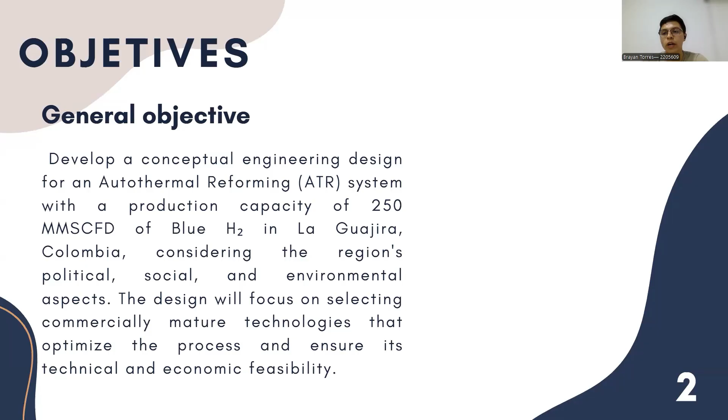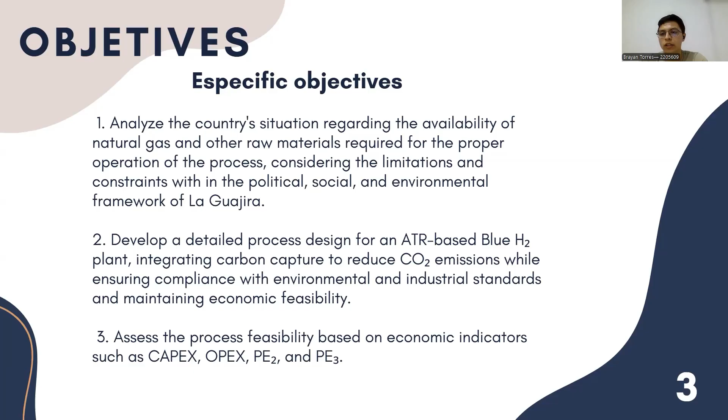Regarding the specific objectives, the first one: analyze the availability of natural gas and the raw materials in La Guajira, considering political, social, and environmental constraints and limitations. The second one: design an ATR-based blue hydrogen plant with carbon capture, ensuring compliance with standards and economic feasibility. And ultimately, evaluate process feasibility using CapEx, OpEx, and the economic potential 2 and economic potential 3.

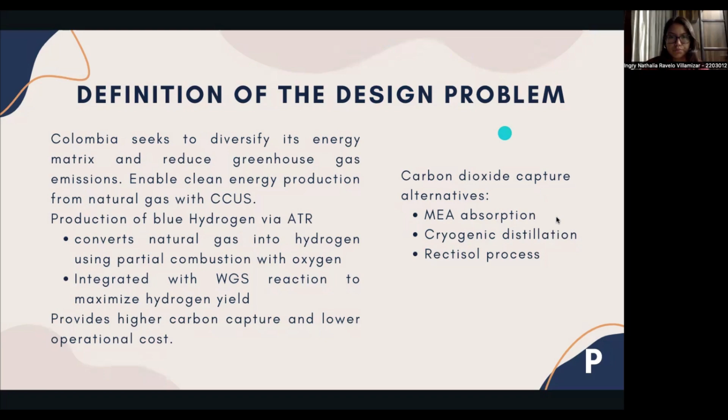Design problem. Colombia faces the challenge of reducing greenhouse gas emissions. In this context, blue hydrogen is a key solution. Process overview. The steam methane reformer is the most used method for hydrogen production. It begins with methane reacting with steam over a catalyst.

This reaction is endothermic. Then it goes to a water gas shift reaction, where CO reacts with steam to produce additional H2 and CO2. This process occurs in two stages: a high temperature reactor and a low temperature reactor. Then hydrogen is purified using pressure swing adsorption, which removes impurities. Meanwhile, the process optimizes energy use by recycling of gases.

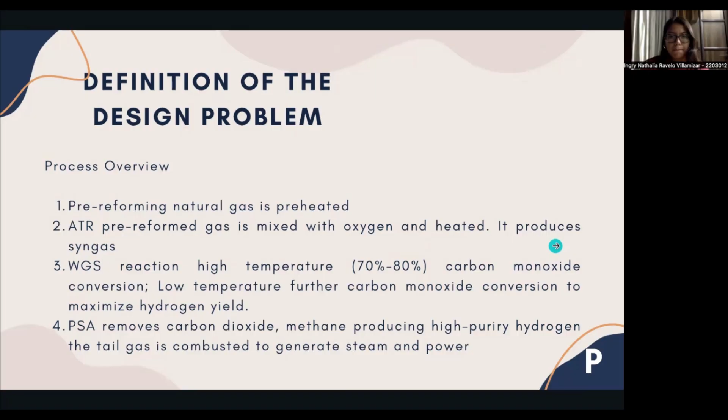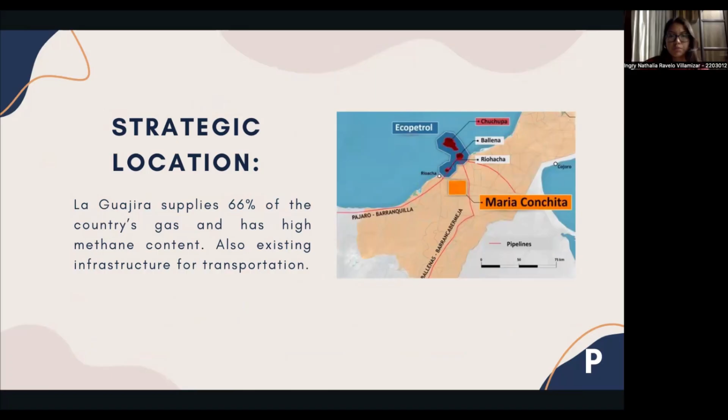We chose La Guajira as a strategic location because it supplies 66% of the country's gas, it has high methane content, and there exists infrastructure for transportation. Some environmental and social limitations are that La Guajira is highly vulnerable to climate phenomena and faces water scarcity. The department's water sources are under special protection. Some constraints are that it requires consultation with indigenous communities, because 73% of Guajira's territory belongs to an indigenous community.

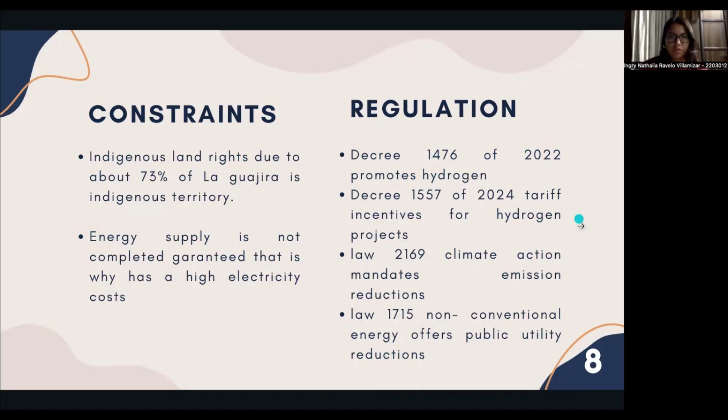Regarding regulation, there currently exist several decrees and laws that promote hydrogen utilization, incentivize hydrogen projects, regulate carbon dioxide emissions, and offer tax reductions. Some technical factors are, for transportation, Promigas ensures a stable supply of natural gas, while Air Liquide provides on-site oxygen, reducing logistic costs, with water from the Ranchería River, ensuring availability. Risks could be water scarcity, oxygen security, and gas supply dependency.

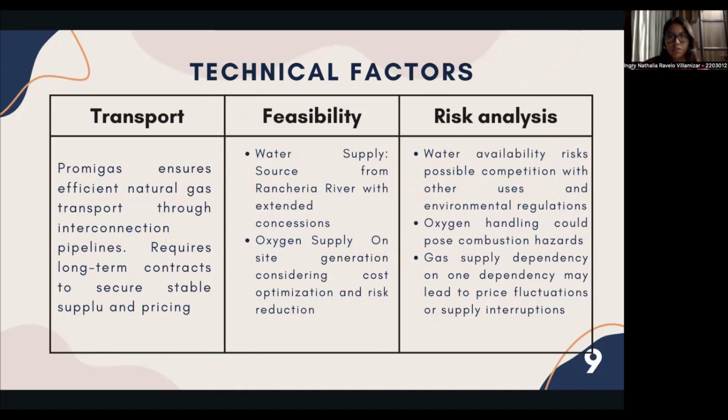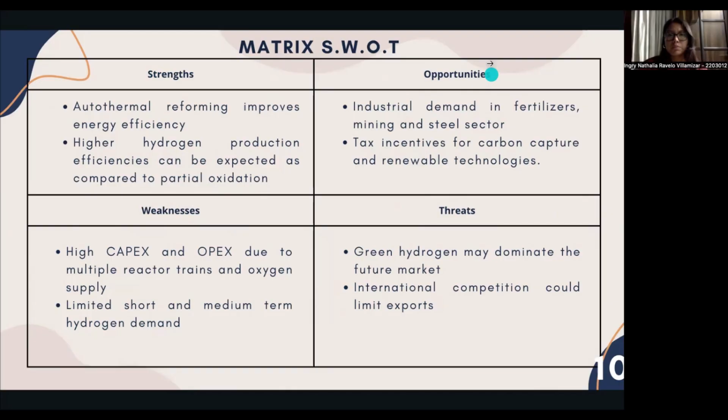All right, I'm Nathaniel. I'm working on solution alternatives. The first alternative we chose was a GHR and ATR reactor alternative. Essentially, instead of using only an ATR reactor, we are feeding the natural gas and steam into a heat exchanger with tubes filled with catalyst that are heated from the output of the ATR reactor.

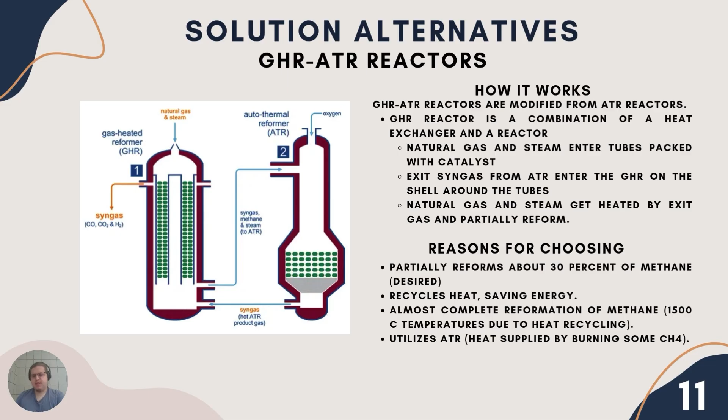This saves a lot of energy, and it both partially reforms 30% of the methane and causes complete reformation of methane in the autothermal reactor due to reaching temperatures of 1500 degrees Celsius. It's very good, which is why we chose this specific alternative for ATR. So for carbon capture alternatives, we have a few different options.

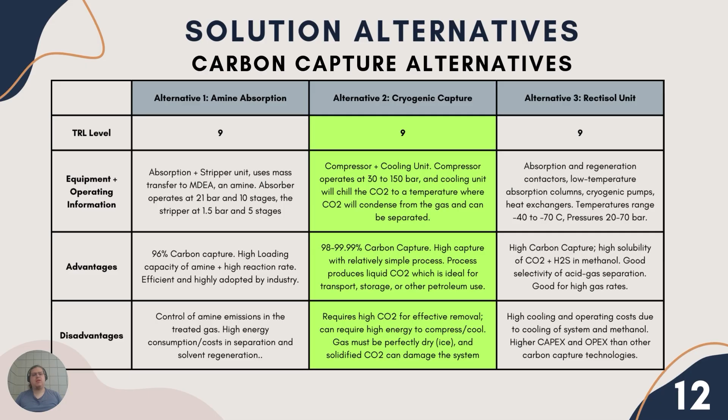We have amine absorption, cryogenic capture, and rectisol units. We ultimately chose alternative 2, the cryogenic capture, as it's TRL9 and is a simpler process that produces up to 98 to 99.99% carbon capture. And it also creates liquid CO2, which is ideal for transport, storage, and other petroleum use. It has some downsides, but I think the benefits outweigh the downsides, as do the rest of the group.

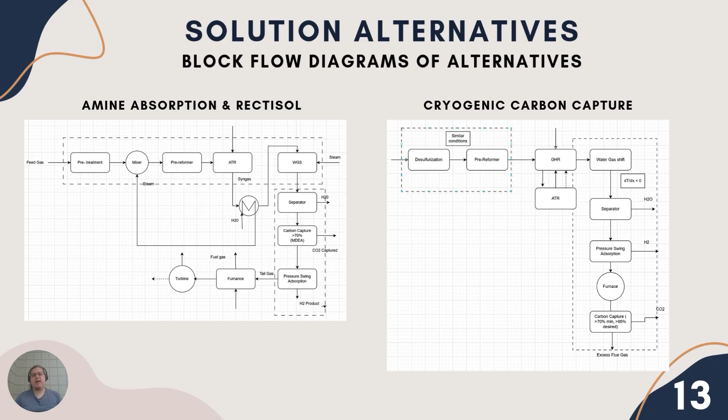These are the block flow diagrams for all of them. As you can see, they are very similar to one another. The only difference really between the amine absorption, rectisol and the cryogenic is that the carbon capture for the cryogenic is after, as you want a high concentration of carbon dioxide in the system.

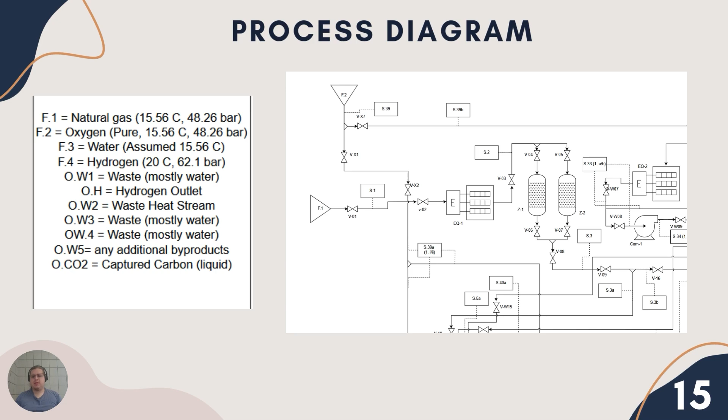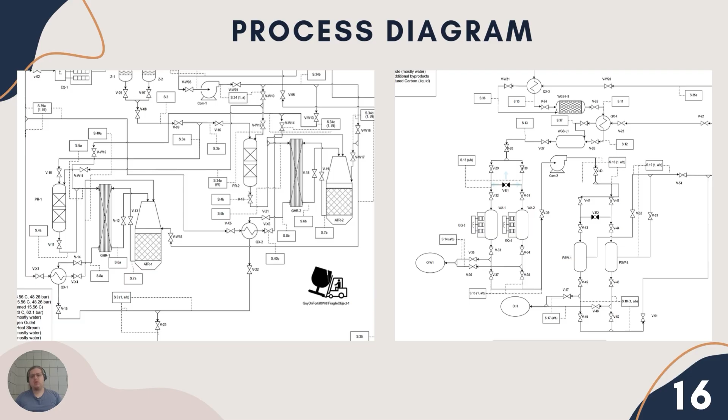The process diagram is very big and complex. Essentially, we have an electric heater heating our gas initially to desulfurize it, and then we have it going to two separate pre-reformer and ATR units. These all go into a water gas shift before going to an absorber and a pressure swing adsorber before heading up into this furnace to heat up all the water in the system.

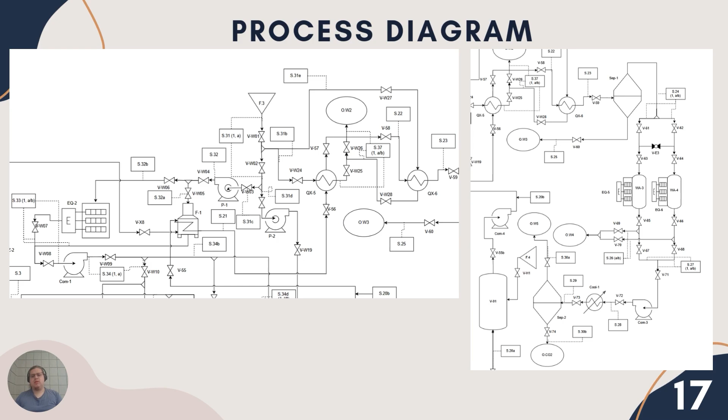And then that flue gas flows down into the carbon capture to get separated into carbon dioxide liquid and the remaining gas. And this right here is essentially all of our equipment. It is a lot of equipment, and it is not the final measure, but this is essentially it for my section. So, thank you.

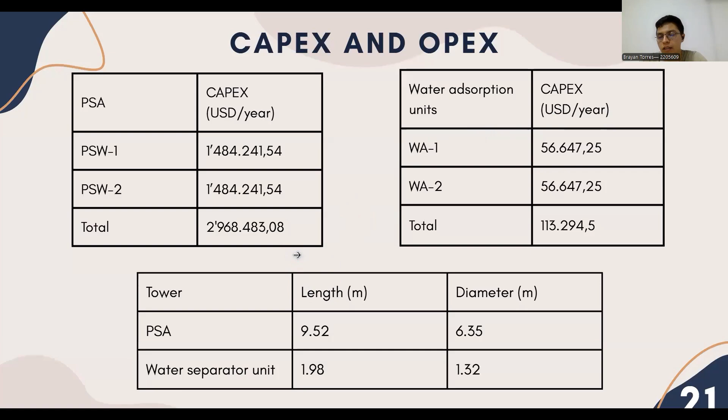Well, in the CapEx and OpEx calculations, the pressure swing adsorption tower had higher CapEx than the water separation unit, because it is significantly larger in diameter and length. On the other hand, the compressors had much higher CapEx and OpEx than the other equipment, mainly due to their high energy use and strong design needed for high pressures and flow rates. Nevertheless, heat exchangers also had high operational costs because of the large heat transfer demands in the process.

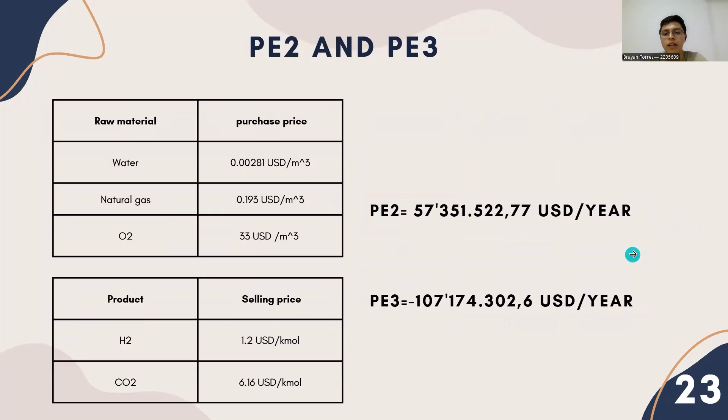A preliminary estimate of economic potential 2 and economic potential 3 was made using the calculated CapEx and OpEx, taking into account raw material costs and revenue from hydrogen and carbon dioxide sales.

As for question 2, what aspects or assumptions would you recommend reviewing in your capstone design work? We would like to first review the ATR reactor versus the GHR ATR reactor, as we believe that we have deviated from the project statement, and as such, we should do a review between the two, and why we should do it. Another aspect of review should be the comparison between the assumptions given by the project statement and the assumptions used in the final report, as we have utilized some assumptions while not utilizing others.

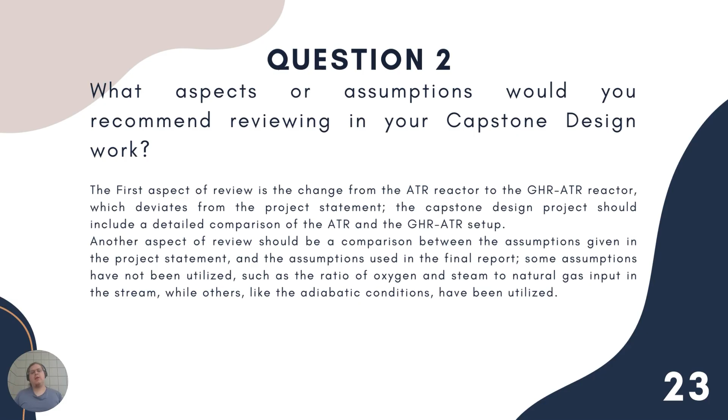Well, in conclusion, the conceptual design for the ATR system for blue hydrogen in La Guajira is technically viable, integrating carbon dioxide capture to comply with environmental regulations. However, it faces economic challenges due to high investment and operating costs, as well as logistical and social limitations in the region. Despite these challenges, tax incentives and the growing demand for hydrogen present opportunities for its development, provided that optimizations and sustainability strategies are implemented. Well, thank you so much for your attention.